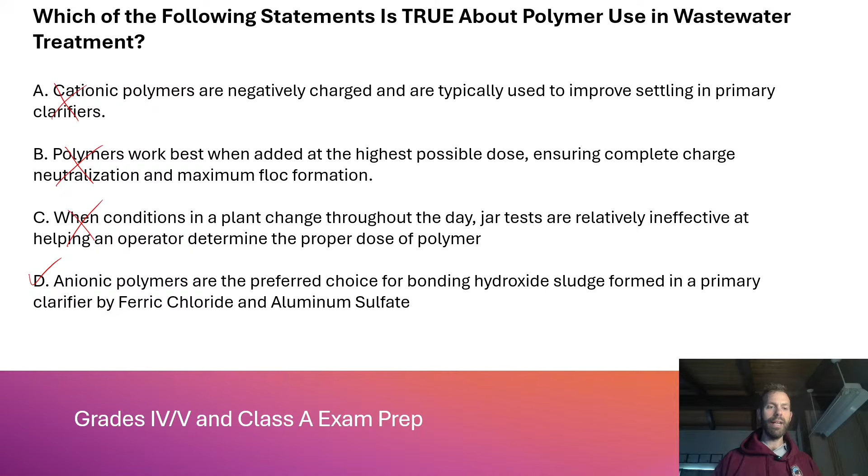One thing I didn't do here, just to keep it simple without being overly complicated—I want this complicated but not overly complicated. You will run into a lot of 'none of the above' options, and sometimes none of the above is the correct answer. Be very careful with those. On my 4th exam I had one I'll go die on that hill was 'none of the above,' and at least one on my 5th exam too. I didn't do any of those here, just letting you know, be ready for that.

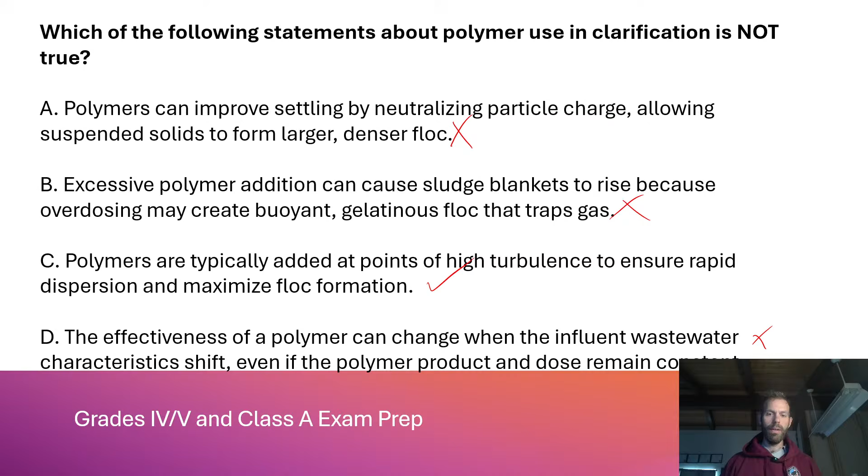Polymers are typically added at points of high turbulence. We already went over this. That is absolutely false, so C is your correct answer. You do not add polymers at points of high turbulence, gentle mixing is needed. And the D statement is true - I'm not going to read it again, but you can come back and look at that if you want. So D is true, so it's not the correct answer. C is the correct answer.

So I like the 'best defines' because it's the best answer. Three of these are absolute non-starters. Only one of them could possibly be true. But sometimes, and I've got some of them on here, you're going to get very, very similar and plausible answers, and you need to choose the best of those answers, okay? This is not one of those scenarios, but they're coming for you.

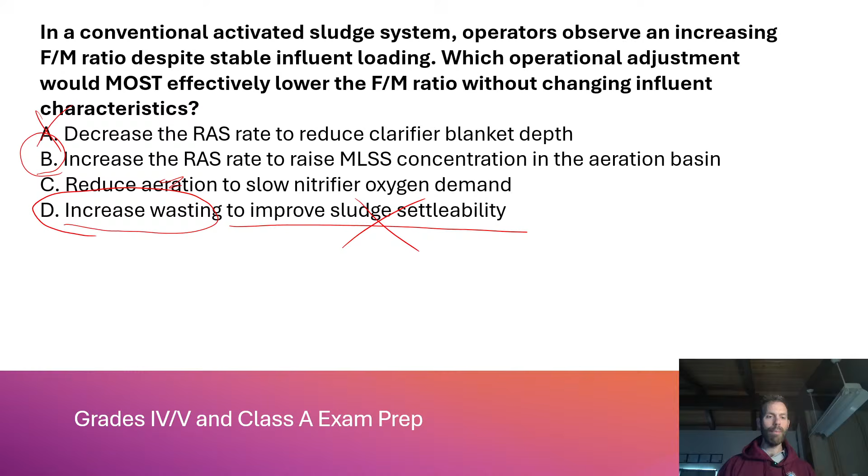Increase wasting would be my operational choice over just increasing the RAS rate, but that's not why I said to increase wasting - to improve sludge settleability, no. I would increase wasting to raise... I'm sorry, I'm wrong about this. I just got confused. Everything I just said about D was wrong. You would decrease wasting. I sometimes get confused on that one.

You decrease wasting to lower the F to M ratio. I'm glad I caught that and it didn't live in perpetuity on my channel that I screwed that up. You would have decreased your wasting to keep more inventory. So I'm sorry, D could have never been right, because if you increase wasting, you will raise the F to M ratio. I'm very glad I caught that. See, if I wasn't doing it live, you guys would have never known that I make mistakes. So B is the correct answer on that one.

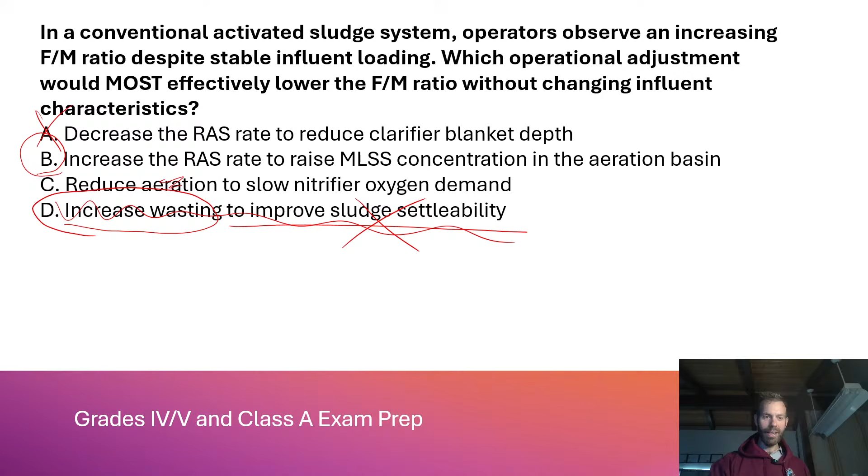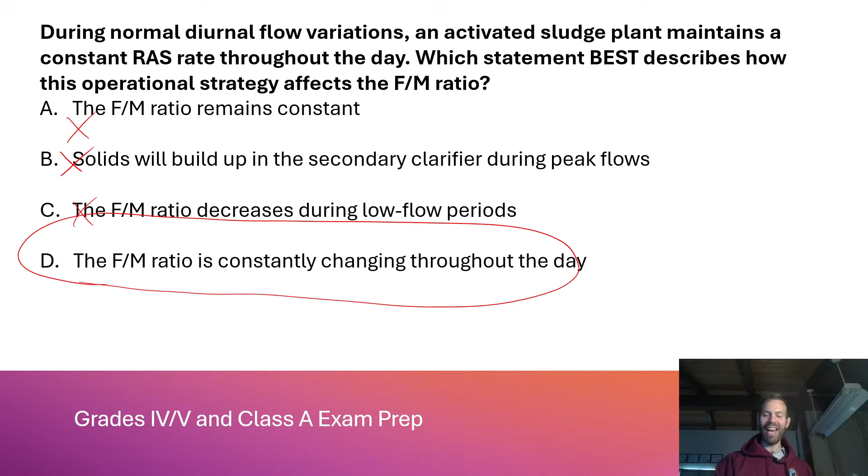Got a chat in here, and that is Matt. What's going on, Turd Nerd, says Matt from Operator Mindset. Thank you for joining, Matt. You just missed one of my, I got confused. I confused myself. Matt and I chat a lot on the phone these days, and I was going through this with him yesterday or the day before, and I said, God, I better write an answer key so I don't trip myself up going through this fast. And I did it, Matt, even though I've got an answer key and everything. I said something wrong. Anyway, next one.

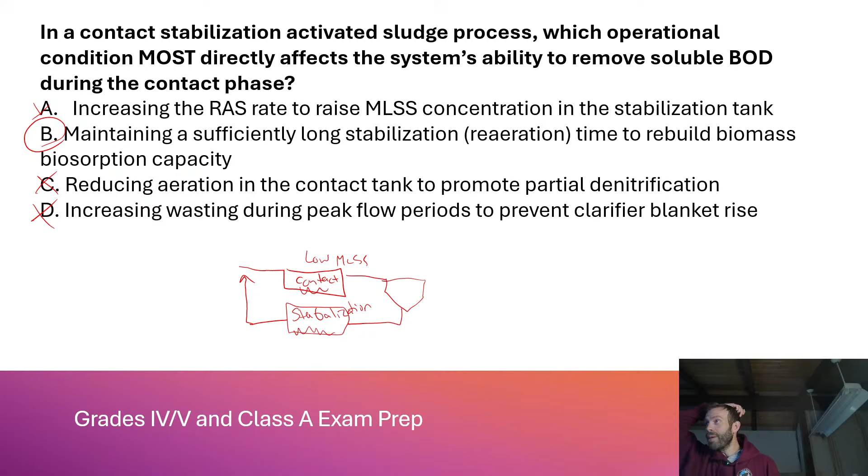Matt says, you are doing great, Shawn. Thanks for putting this information out there. Absolutely. Well, mistakes, they make you more human, right? And it should give you guys hope that goofballs like me can get through all this, and you can too. And a lot of you guys out there, I'm going to be honest, I watch Reddit, I watch Facebook, I watch LinkedIn. There are so many talented operators out there that know a lot more than I do. I'm going to be very frank about that. I think Matt and I just have the chutzpah to put a YouTube channel together about it, and we just love what we do, so there's a lot of talented operators out there that are way better than I am, and if they want to start a YouTube channel, I'll be right there as their first subscriber for sure.

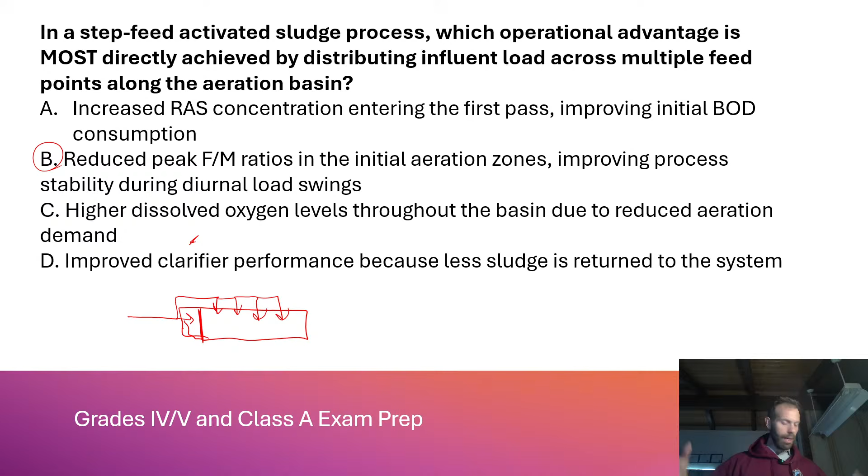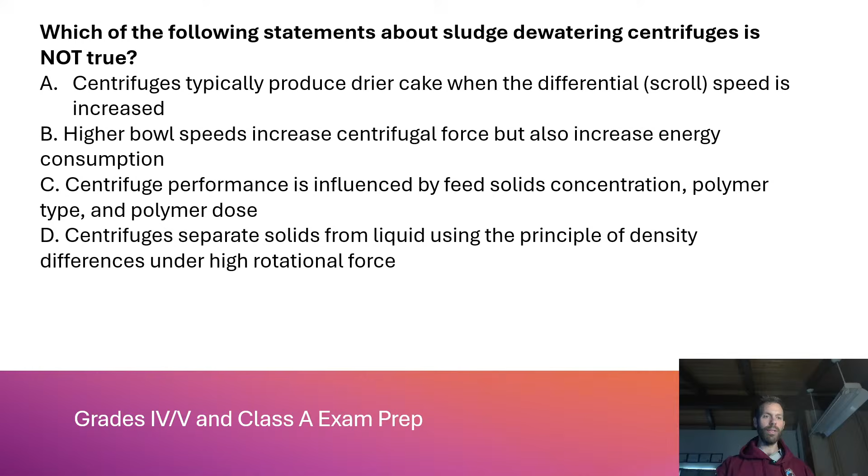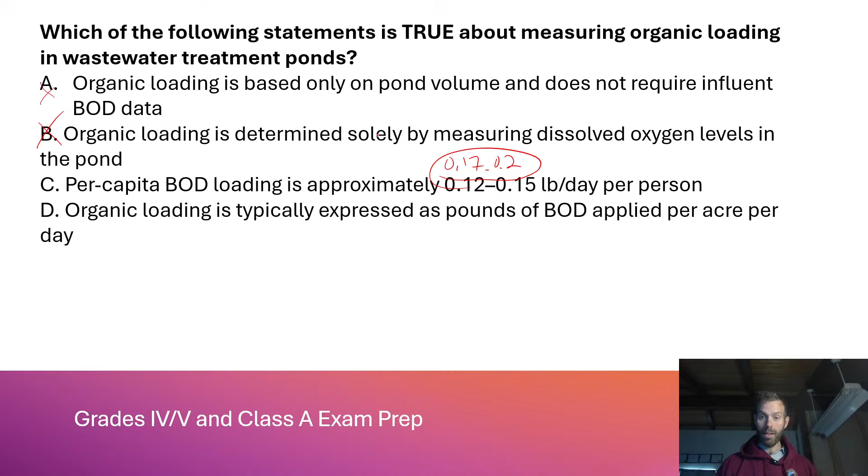Per capita BOD loading is approximately 0.12 - no, it's 0.17 to 0.2. That's the textbook number, okay? If you're given a per capita math problem, use 0.17 to 0.2. If they do not specify the number, it's 0.17 per person, pound of BOD per day per person, okay? So C is wrong. And D, organic loading is expressed as pounds of BOD per acre per day. Yes, pounds per acre per day.

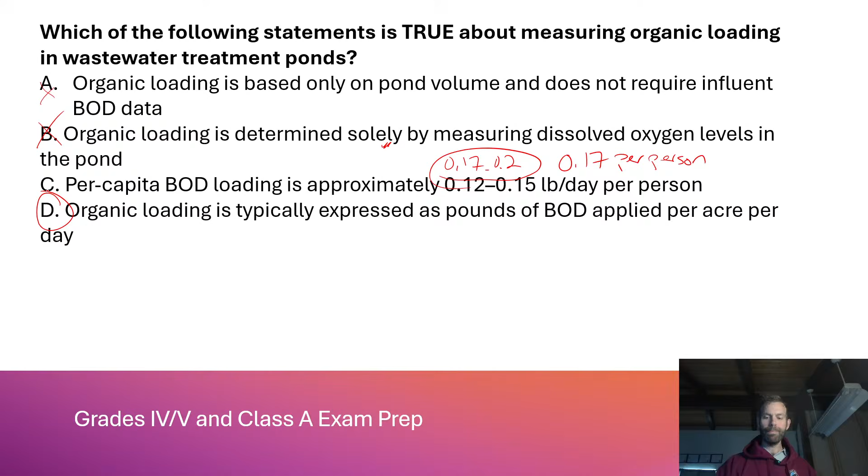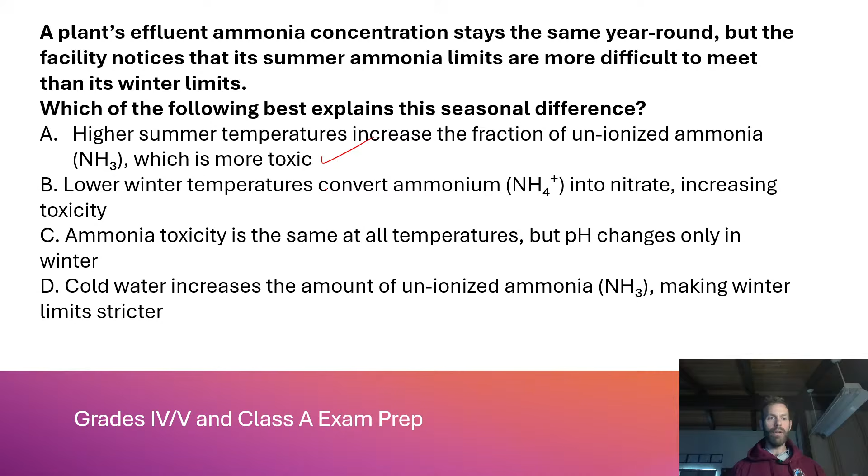And then the rest of these are not right, so I'm not going to read them all. B, C, and D are all incorrect.

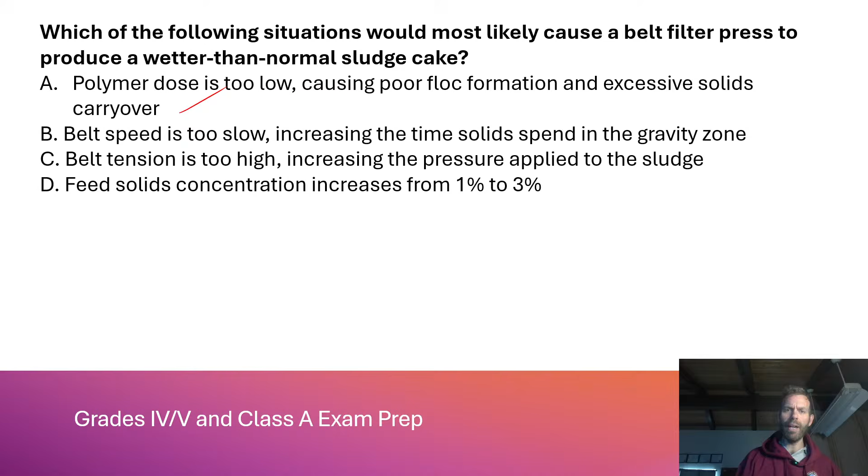I don't know what weirs are clean. I was going for something there. Maybe somebody scrubbed them that morning. I don't know. I don't know why I put the weirs are clean in that. But let's talk about what I'm getting at here.

Okay, if you're seeing this, it is A, sludge has become septic due to insufficient sludge withdrawal. Carly, I think she said A question mark, so I don't know if it was, both of these are A, so if it was the last one or this one, you're correct on both.

Yeah, man, you're gonna get these gas bubbles forming. I wanna get a video of it next summer. My primary clarifier, it's kind of hard to explain, but I actually get denitrification accidentally in it in the warmer summer months, and I'll do a whole video on it. Without you being able to see what happens and how the water flows through the plant, the recycle streams flow, you'd be like, well, how are you denitrifying in your primary clarifier if you're not even using it?

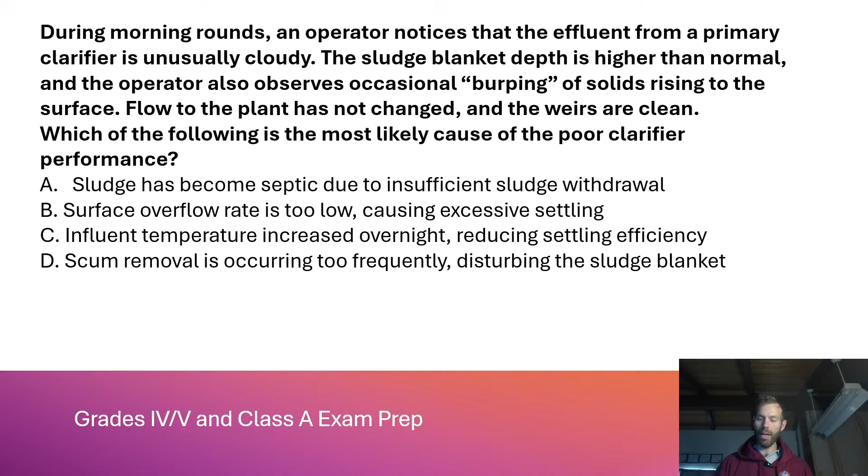The rest of these would not cause burping necessarily. So yeah, no, it's A.

So let's go through it. A, the Regional Water Quality Control Board. Well, you would call them. That's my regulator. But if it's a large spill, would I call them first? No. There was a lot of debate about this, actually.

I had my annual inspection with my regulator earlier this year, or actually, maybe it was in August. Now, wow, it's been a while. And I asked her this question because different people said different things to me. And she said, no, you would call Cal OES. You call it, yeah, we want to know, and you have to file the report with us. But if it's a large spill, Cal OES has a 24-hour a day, 7-day-a-week emergency line.

That's who you call if it's going down, okay? Local fire department, you would, yeah. County environmental health, you'd call all of these people and notify them. But who are we talking to first, okay? It's Cal OES. Those of you who are not in California, this does not apply, but you might get something similar, so know who you're supposed to be calling.

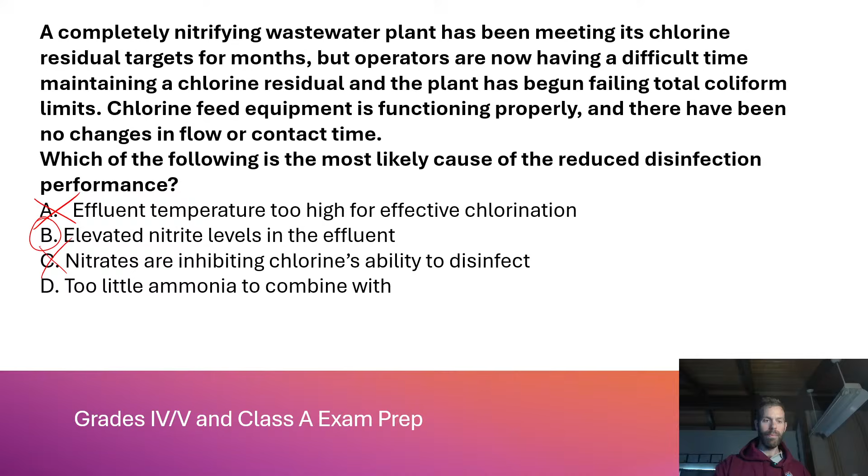So A, it relies on plug flow hydraulics? Absolutely not. A plug flow is this: here's my basin, and it's just straight through, that's plug flow, okay? Complete mix is different. Instead, imagine this could be a basin like a square, but let's do a circle, and it's just churning, it's this big tub of chocolate milk, right? That's what I like to say. You dump your influent in, and it hits, and it just mixes in with everything. It's mixing all the time, and flow is not plug flow like this. This is mixing too, but not in the same way that a complete mix system is.

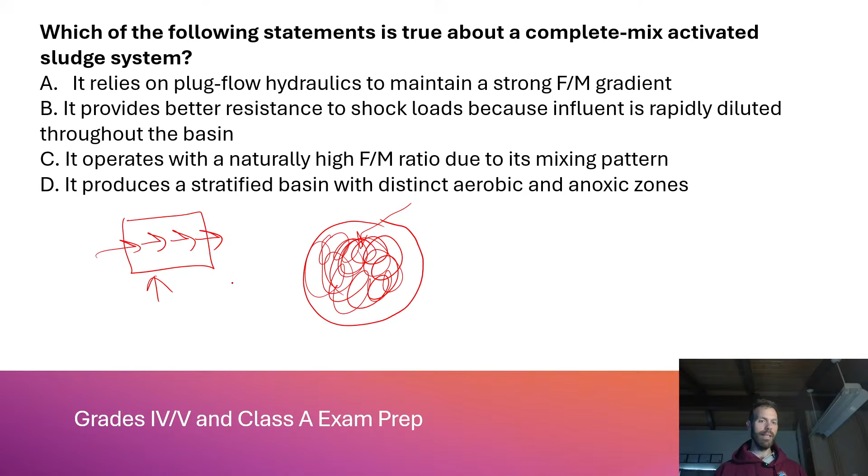So the answer here is B, it provides better resistance to shock loads because influent is so rapidly diluted throughout the basin. It's completely mixed up, okay? It does not operate with a naturally high F to M ratio.

You need to know all the different F to M ratios of all the different activated sludge variations, because you might be quizzed on which ones are lower or higher than others, and which ones operate at 0.2 or 0.5 or 0.1 or 0.15. These tests are no joke. It sounds like, oh God, I gotta memorize all those numbers. Yes, you do, sorry to be the bearer of bad news. You gotta be able to navigate some of these more advanced questions. And of course, I'm not getting on a soapbox about the tests, but we all know we'd just go look it up in a book. Like, why do I really need to know that for a test? But it's the reality we live in.

You must know it. And no, there's no way it produces a stratified basin because you're mixing it up all the time. So the answer is B.

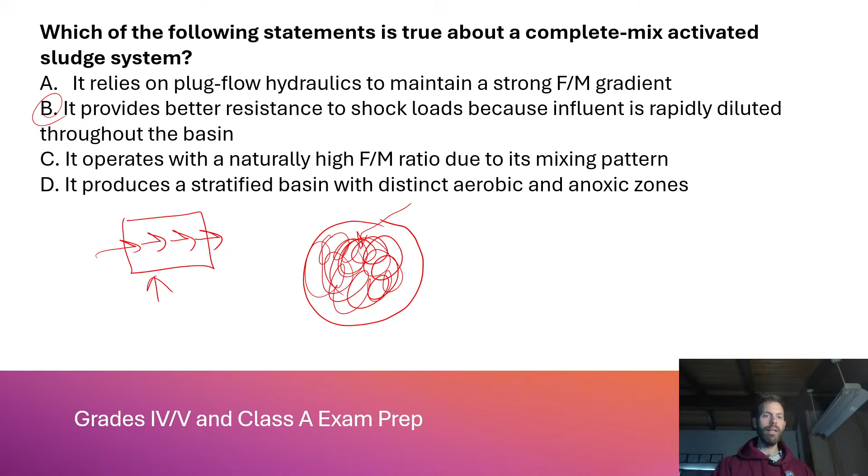This is very similar to what I just asked, but I wanted to include it because of what I just said. You need to be able to compare and contrast. The layman would look at this and go, okay, let me just do step feed again. We've got entry points here, here, there, there, there. Complete mix, mixed up all the time, all the time, okay. Now there's a difference between these two. Remember what I said earlier: step feed's only swapped to when you need it. It's not always on. Step feed oftentimes, you can have plug flow through your plant, and then when you need it, you move to step feed.

So why would I choose complete mix over step feed? To reduce the impact of peak flows by distributing across multiple feed points? No, that's step feed. So I'm choosing complete mix. To create a strong food gradient that favors rapid BOD removal at the front? No, because it's completely mixed. The front of what? It's a big circle. So no, B is not right.

C, to provide maximum dilution of incoming loads and improve resistance to shock loading? Yes, because typically by the time I've switched to step feed, the shock load's already here and I've realized it, and now I'm moving to try to disperse and spread out that loading across the entire aeration basin, but I'm already behind the 8-ball. Where complete mix shines versus step feed is it's always mixed all the time, so those gnarly loads, by the time you realize it's hit you, you're already diluting it and can adjust, so you're a little safer against those. And D's wrong, so no. Keep losing my pen, there it is, D.

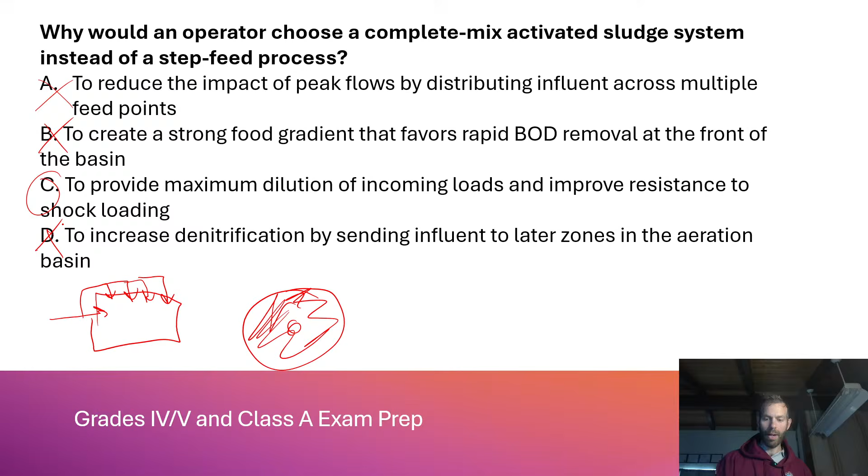Next one: which condition is most likely occurring if a dissolved air flotation unit develops a thinner than normal float blanket and effluent turbidity begins to rise? This would be a DAF unit, DAF or DAFT, dissolved air flotation thickener. They're really not different, they're just called different things. A thickener you're going to see used on WAS, waste activated sludge. A DAF is going to be used on FOG and stuff, like industrial plants. They use them to get the fats, oil, and grease out of there, so you lower the BOD loading downstream.

So the float blanket is what floats to the top. A, the polymer dose is too high, causing the float to harden. B, the saturator pressure is too low, reducing bubble formation. C, the flights are operating too fast, creating surface disturbance that prevents a stable float blanket from forming. D, the air to solids ratio is too high, causing excessive flotation.

You need to know the air to solids ratio. I don't want to give the wrong number, but it's like 0.01 to 0.05. Oh, I don't know if I'm telling you the right number there. It's a really small decimal, but look it up, please. If you're watching this, don't take that to the bank because I don't know that for sure. I don't have a DAF unit. I had it memorized, it's very, very, very low, it's like 0.01 to 0.0 something.

You might be asked to answer what that ratio is, or it might be one of the correct answers about a DAF unit is the air to solids ratio, okay? So just be aware of that.

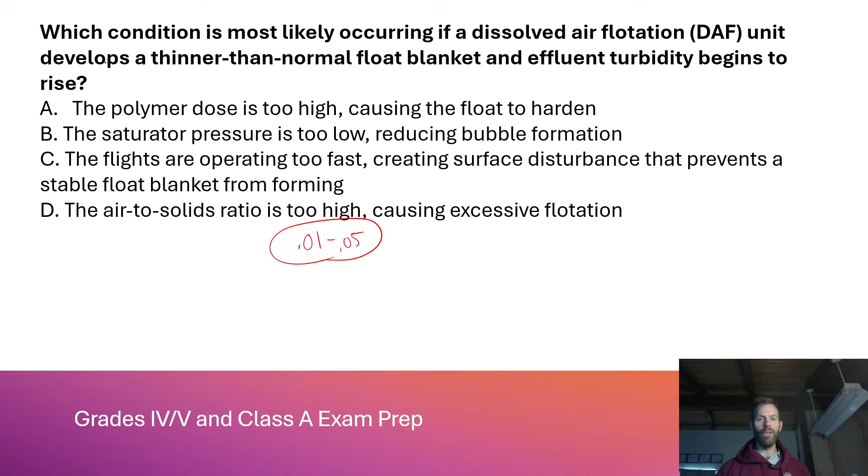So let's go through these. The polymer dose is too high, causing the float to harden. No, that's not going to develop a thinner than normal float blanket. It could cause it to harden and be jelly-like, but it would be pretty thick. So no.

B, the saturator pressure is too low, reducing bubble formation. Maybe, but from my research, this might actually create a thick float, okay? So not necessarily B, but if C wasn't in there, I might look at B.

C, the flights are operating too fast, creating surface disturbance that prevents a stable float blanket from forming. Yes, those flights on the top move very, very slow. The one DAF unit I know about in the county I'm in hasn't responded to my request to do a video, so I'm hoping at some point we could cover dissolved air flotation. I don't know very many around here, but they move really, really slow. They don't move fast.

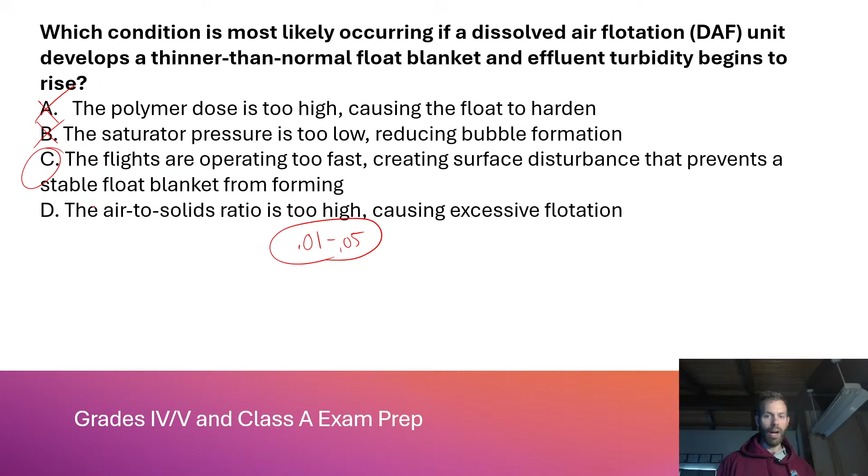And if they're going really fast, that float is going to be thinner because you're skimming more off really fast, and effluent turbidity will rise. Once you get a solids blanket, if you've ever seen these flights move, they move so slow because the faster you move, the more turbulence there is. You could shake that sludge up and it would disperse. You don't want to do that. So yeah, D is not correct, because if you're causing excessive flotation, you have a thicker than normal float blanket.

Which of the following statements is not true regarding chemicals commonly used in wastewater treatment? A, ferric chloride is often used for phosphorus removal and can help improve sludge dewatering. B, sodium hypochlorite is used for disinfection but degrades over time, especially in warm storage conditions. C, polymer is typically added to increase floc strength and improve solids capture in clarification and dewatering. D, alum increases pH as it reacts in water, making it useful for raising alkalinity in low pH systems.

Which is not true? Let's go through them. A, ferric is used for phosphorus removal. Yes, and yes, so A is correct, that is a true statement, so A is not the correct answer.

B, sodium hypo, this is a true statement, so it is not the correct answer. It will absolutely degrade in warm storage conditions. It happens to me here, and then I've got to increase my dose. If I forget to change my settings on my chemical feed pumps after I get a delivery, my chlorine shoots through the roof and I might get a high chlorine alarm on my effluent. It's a thing. Whenever a delivery comes, just make sure you're adjusting your dosing.

Polymer, this is a true statement. C is true, so it's not correct. You are using polymers to increase floc strength and improve solids capture in clarification and dewatering.

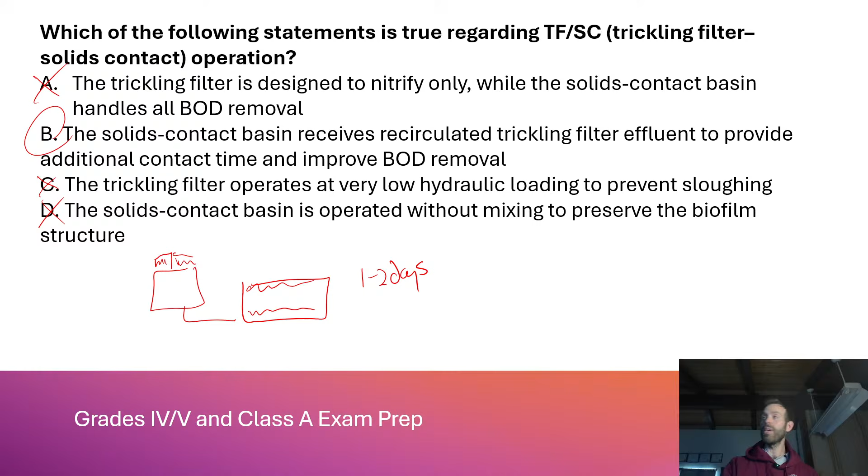Sun says B, B, B, B, B, B. Yeah, B is correct, all the rest are wrong. Thank you, Sun, thanks for being so active in the chat. I appreciate it. Oh, and he says recirculation is preferred to improve efficiency. Okay, well, maybe I messed my wording up on this question, and you're catching a nuance in my wording. So either my wording is incorrect or I misunderstood the science behind it. Thank you, Sun, I appreciate your input. Let me get back to you guys in the comments section after I do a little research on that so I can understand it better. And Sun, feel free to drop more resources or even email me and we can talk about it.

If you run one of these plants, Sun, if you're open to an interview on the channel, that might be cool. If we could just talk about it. That's something I'm open to.

So, which of the following statements is true regarding the amount of BOD entering the plant during a storm event? This one is tricky and catches a lot of people off guard. A: heavier flows cause the incoming organic load to dilute, making it easier for microbes to consume all the BOD. B: heavier flows dilute the concentration of BOD, thereby reducing the overall amount entering the plant. C: peak wet weather flows up to 3 times design flow do not impact organic removal efficiency due to dilution effects. D: heavier flows dilute the concentration of BOD, but the overall amount entering the plant increases. A is wrong. Your concentration dilutes, but that doesn't mean it's easier for the microbes to consume. Heavier flows dilute the concentration, thereby reducing the overall amount - no, this is the big trick.

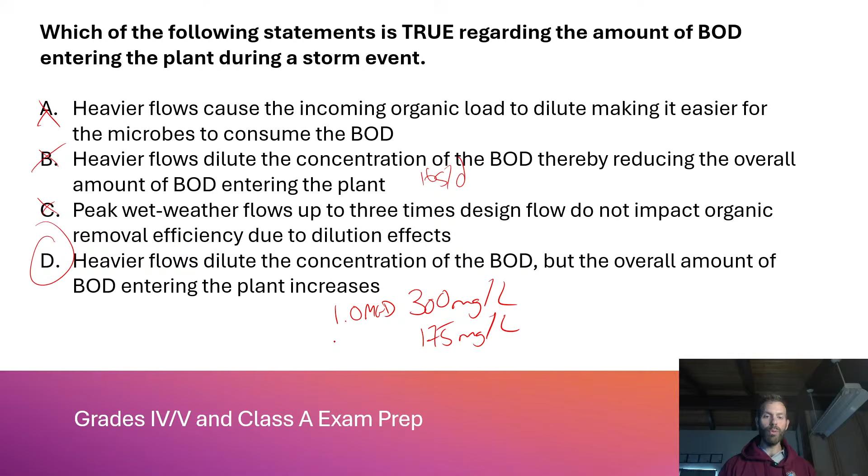If you're asked about concentrations dropping, that is correct, but I didn't ask about concentrations. What do we measure? Pretty much anything in wastewater treatment - pounds per day, not concentration. So peak weather: C is wrong, D is correct. Heavier flows may dilute the concentration of BOD, but let's do a thought experiment. Say my normal municipal flows are 300 milligrams per liter, at 1 mgd, let's keep it simple. But my diluted BOD is, let's say, 175 milligrams per liter, which is a little less than half. But my flows went to 3.5 mgd. I have more BOD - think about all the stuff like infiltration and inflow. There's organics entering, there's soil and stuff from people's drain pipes and downspouts, and all the junk in the collection system that's cut loose and heading your way. So the concentrations may drop, but your overall pounds go up, okay?

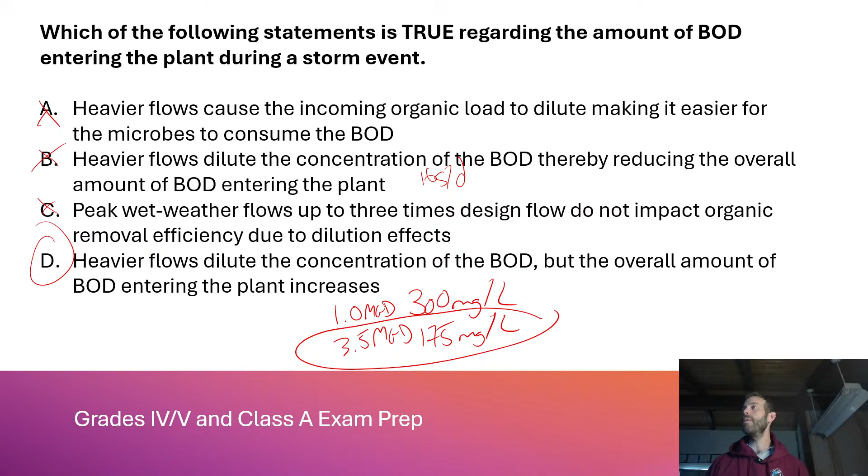Oh, I'm getting lit up in the chat here. This is a lot, Sun. I am from India, not so much fluent in English. Okay, well, maybe there's something lost in translation between our definitions, but if you've got that, that's cool, man, whatever. I'm totally interested in digging into that question because I don't want to give out bad info. I was pretty well researched on that, but dude, I'm about as open as they come - if I'm wrong, cool, man. And then he says storm brings big particles into the system - yep, and like vegetation, yep, absolutely. Thank you, Sun. Yeah, D is correct.

Which federal regulation establishes the standards for the use or disposal of sewage sludge, including pathogen reduction, vector attraction reduction, pollutant limits, and management practices for biosolids? This is a federal law - everyone needs to know this one, no matter what state you're in, if you're in the United States anyway. A: 40 CFR Part 141. B: 40 CFR Part 122. C: 40 CFR Part 503. D: 29 CFR Part 1910. Which one is it? Not going to read all that - there's no need to. It is 503. The correct answer is C. The 503 regs is what they are called. Just know those, that's it.

Now let's have a question about them. Which of the following is not true about Class B biosolids under 40 CFR Part 503? A: Class B biosolids must demonstrate a geometric mean fecal coliform density of less than 2 million MPN per gram based on at least 7 samples collected over a representative period. B: Class B biosolids may meet vector attraction reduction by achieving a minimum of 38% volatile solids reduction or by meeting one of the other approved VAR options in Part 503.33. C: Class B biosolids require additional pathogen testing for salmonella, enteric viruses, and helminth ova, similar to Class A requirements to confirm adequate pathogen reduction. D: Class B biosolids rely on site restrictions like harvest delays, grazing restrictions, and public access limits to reduce potential exposures following land application. I'm not going to read all that again - the one that is not true is C. They don't have to go through the same pathogen testing that A does, but you should know all these requirements for B and A. The rest of these statements, A, B, and D, are true, and it would behoove you to know that.

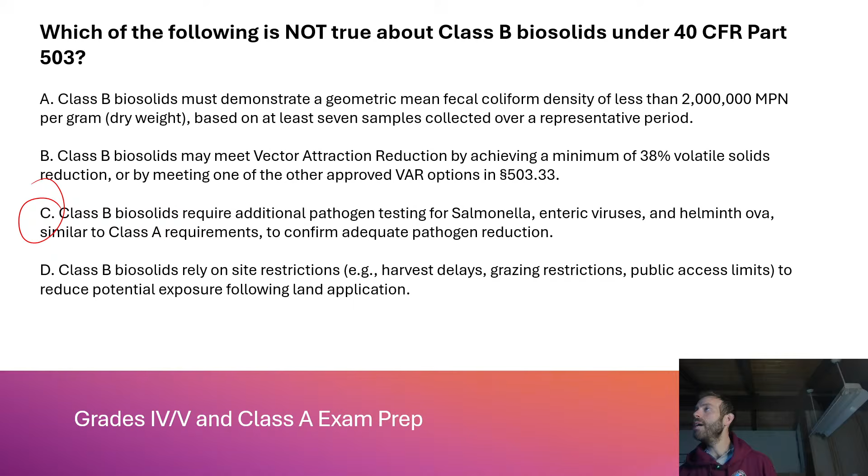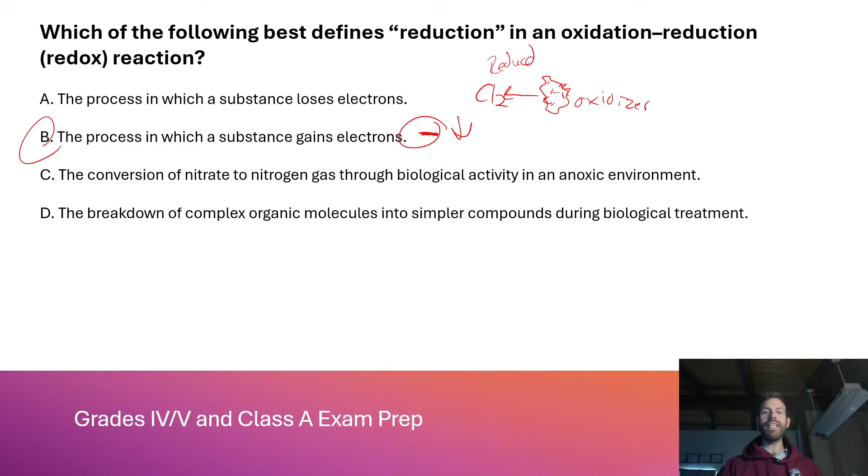So when I'm oxidizing something, let's take an example. I have a bacteria - this is my little bacteria, okay? I'm disinfecting, and I use Cl2. Keep it simple - Cl2 is an oxidizer, right? And the bacteria is going to be what's oxidized. The oxidizer takes the electrons and reduces. I've reduced the oxidizer because it gained the electrons, and I oxidized the bacteria and killed it by taking its electrons. An oxidizer will oxidize other things, and when it does that, it itself reduces. So just chew on that a little bit.

I got a lot of answers from Sun - thank you, Sun, for being so active. He says denitrification takes place in secondary sedimentation and leads to sludge bulking. If it happens in the sludge, yes, if denitrification happens in the secondary clarifier, it will float your sludge blanket. So if you get a question about floating sludge at the top of your secondary clarifier, and you sludge judge it and all the water underneath is clear, you have denitrified in your secondary, okay? You should know about that. Your goal is to make sure that does not happen - you want to either increase recycle streams, waste more, increase dissolved oxygen, whatever it is you and your plant have decided needs to happen. So what Sun is referring to is when it does denitrify in the secondary, it will float your blanket, and that is not what you want.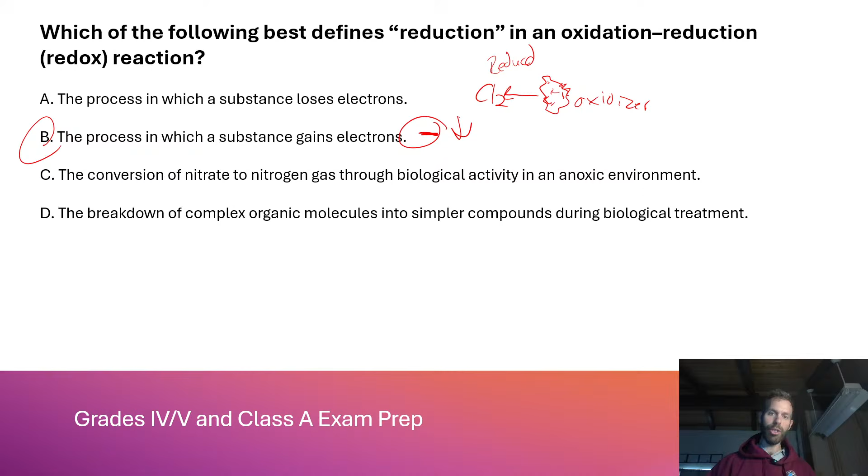And yeah, you got that right, Sun - on this one it's B, the process in which a substance gains electrons.

Which of the following statements about ferric chloride use in wastewater treatment is not true? A, ferric chloride can precipitate orthophosphate by forming insoluble ferric phosphate compounds. B, ferric chloride addition can lower pH by releasing hydrogen ions. C, ferric chloride is commonly used to enhance sludge dewatering by improving floc structure. D, ferric chloride increases alkalinity in the aeration basin because ferric ions consume nitrate during biological phosphorus removal. Which of these is not true? For the sake of time I'm not going to read them all - D is not true. No, it does not increase alkalinity, and I don't see ferric ions consuming nitrate in phosphorus removal. It's just a nonsense statement.

That whole statement's nonsense. Ferric chloride should decrease alkalinity.

When a treatment plant is experiencing nitrite lock and free chlorine is being rapidly consumed, which action can temporarily improve disinfection capability while the underlying cause is addressed? This is a tricky one. I did this for a very specific reason. I'm going to set up a premise. You might get this or something like it. I very much specified free chlorine. Which action can temporarily improve disinfection capability while the underlying cause is addressed?

Let's go through these. A, increase aeration in the secondary clarifier to boost dissolved oxygen levels. This may be an option to fix the underlying problem. It may be, but I don't have enough information to actually address nitrite lock. I don't know if it's a pH thing, an ammonia thing. I'm not really sure what is causing the nitrite lock. So A could be a long-term solution.

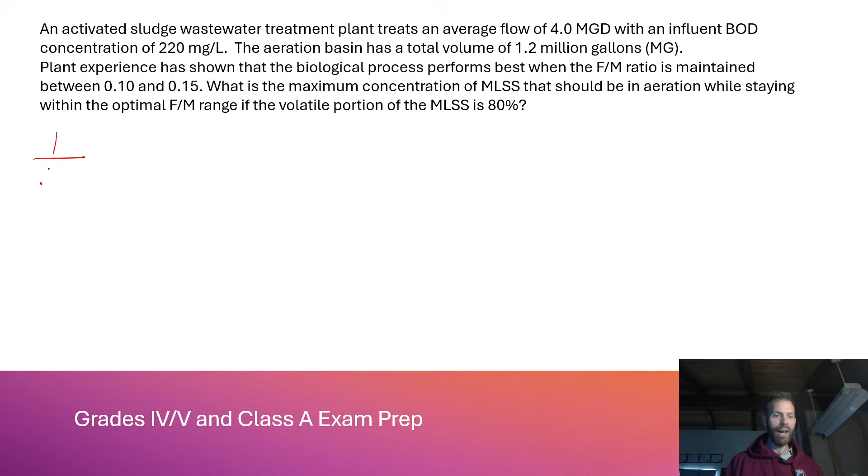Okay, so this is how Christian does it, and I'm stealing his method if he's watching. 1 divided by 0.1 — why am I doing that? Because we have a food to microorganism ratio. So 1 divided by 0.1 is 10. Why is this number important? Because for every 1 pound of BOD coming into the plant, I have 10 pounds of MLVSS, mixed liquor volatile suspended solids. That's an F/M ratio, right?

So now what I need to do is use the pounds formula: 4 MGD times 8.34 pounds per gallon of water times 220 milligrams per liter.

I got an all caps thing from Sun here. Civil engineering, wastewater engineering is in our 3rd semester. Are you, sounds like you're a college student, Sun. Cool, yeah. So if this is fresh in your mind, this is pretty simple stuff for you.

So this is our pounds formula on BOD. 4 times 8.34 times 220 milligrams per liter is 7,339, it's 0.2 but I'm just going to drop that 0.2. Pounds of BOD per day. Say that per day. And then what I'm going to do here is take these pounds, 7,339, times 10.

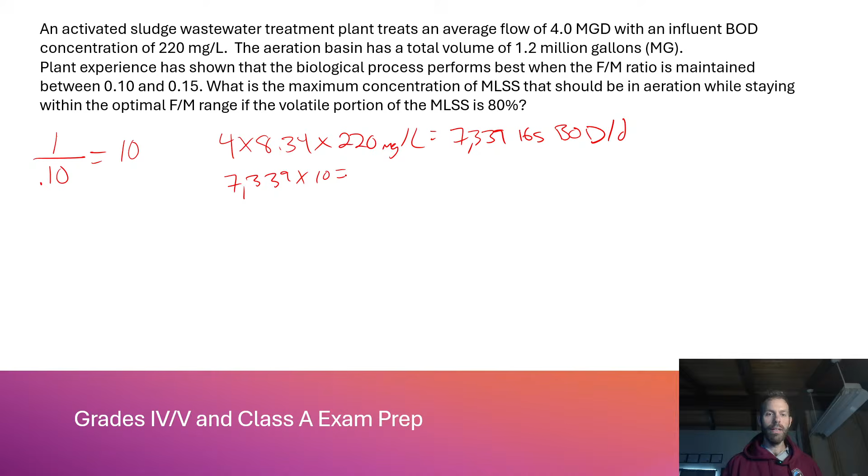That is 73,392 - oh sorry, 73,339, I just didn't take the 0.2 out of my calculator. Hold on, 7339 times 10, 73,390. Sorry guys, again I'm doing it live so I'm messing up and you guys will be okay with that. Pounds MLVSS.

Okay, next. The aeration basin has a total volume of 1.2 million gallons. We've got a volatile ratio of the MLSS of 80%. So what I'm going to do first here is get my pounds of MLSS, and then we're just going to do a reverse pounds formula and we're done.

So, 73,390 - and if you did 0.2, if you didn't drop the 0.2 off, this would be 73,392. You divide by 0.8, sorry, divided by 0.8 will give me my MLSS in pounds. That's 91,737.5, I'll just say 737, I just dropped the 5 off. 91,737 pounds of MLSS.

I'll explain in a second, Sun. 91,737 pounds of MLSS, and so now I'm just going to do a reverse pounds formula. 91,737 divided by 8.34 pounds in a gallon, divided by 1.2 mg - that's the aeration basin. 91,737 divided by 8.34 divided by 1.2 is 9166.3, 9167 depending on how you rounded. 9166 milligrams per liter is your answer.

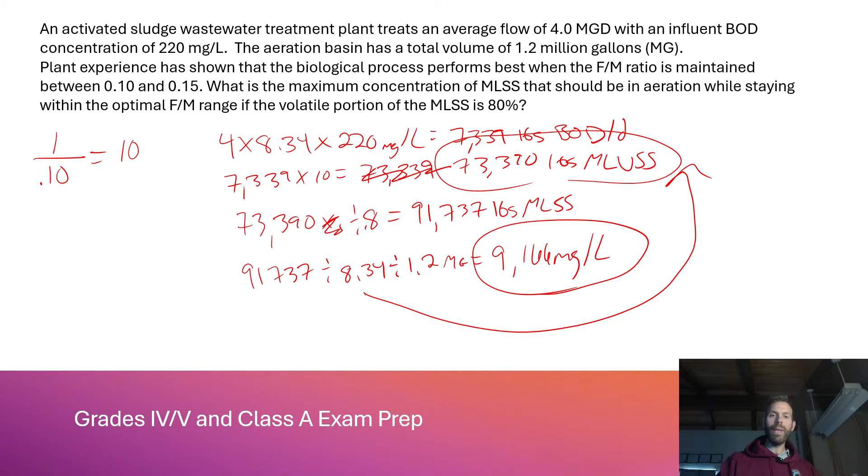It's not, you don't have to solve it as fast as you can, Sun. I'm just going to do this for people because I've got to get back to work. So go ahead and pause this if you want to work it out without me talking, but I'm going to keep going.

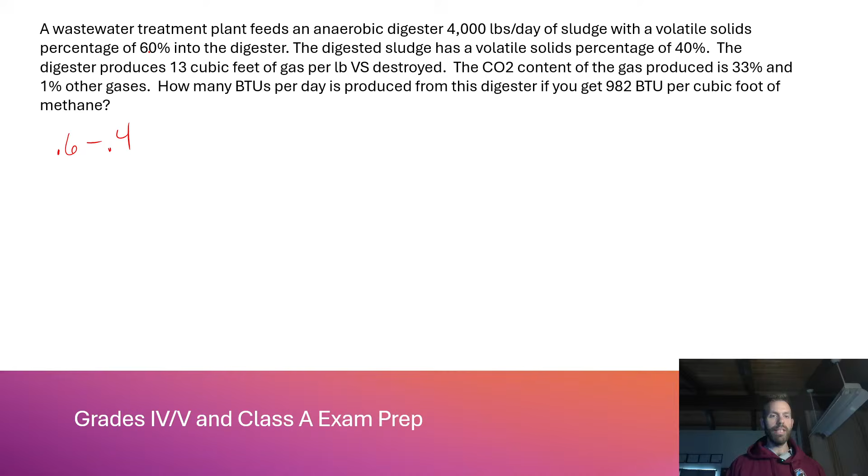Okay. First thing I like to do is get my volatile solids reduction. So the volatile solids reduction math equation is, in decimal form: in minus out. So 60% is in, 40% is out. In minus out, divided by in minus (in times out), times 100. Okay, that's your volatile solids reduction.

I'm actually not going to multiply by 100. I'm going to leave it in decimal form, because I got to use that decimal. So 0.6 minus 0.4 is 0.2.

0.6 minus, and then you do these parentheses first, 0.24. Got to do the parentheses first, we'll screw the whole thing up if you don't. So this is going to be 0.2 divided by 0.6 minus 0.24, which is 0.36. 0.2 divided by 0.36 is 0.55 all the way continued, so I would say 0.556. It would be 55.6% volatile solids reduction, which is pretty good.

And so that's my volatile solids reduction. Now, I've got 4,000 pounds a day of sludge with a volatile solids percentage of 60%. So I take 4,000 pounds a day of sludge, times 0.6. My actual volatile solids being fed is 2,400 pounds.

Now, what am I reducing from that? Let's bring it down here, I'm starting down here, guys. 2,400 pounds of volatile solids. What's my reduction? 55.6%, or 0.556. That is 1,334.4. I'll just call it 1,334 pounds destroyed.

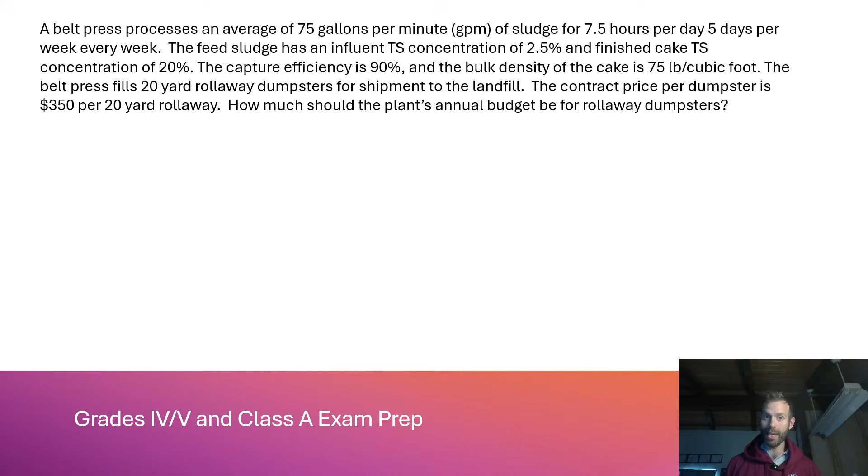Before I get into this, the answer to Sun's question: do you allow calculators to solve these problems? Yes, you are allowed a calculator. Now let me talk about the calculator. In California, I was actually very impressed with the calculator they gave me for the grade 5. It's not scientific, you're not allowed any, it's just a basic 10-key calculator.

Like actually I've got one right here. This is what you're gonna get. Very simple, you're not allowed anything other than this. Sometimes they're on the computer, and that is awful. I had to have that calculator on my T3, and I was clicking the buttons on the keypad. I've not seen that on the wastewater side, but I've heard of people getting that when they go to the testing center. I would call ahead and ask if you're going to be given a calculator that's physical like this.

I find this better, but if you're not going to be given one of those, I just recommend you get used to doing it on the computer, because it is what it is. It used to be that you could bring your own, and they would just make sure that you didn't have a scientific one with equations saved in it and stuff. But I never really understood saving equations, because they give you a conversion sheet, you're allowed a conversion sheet, they give it to you.

And so anyway, let's read this one. Oh, we already read it. Let's talk about this. We are trying to budget an annual budget for rollaway dumpsters.

So the first thing I'm going to figure out is my pounds per year fed to my belt press. Sorry, not million gallons per year, in pounds per year. Sorry, I'm getting tired, it's been a long... I said it was gonna be an hour and a half, and here we are at 2 hours. I just can't help myself.

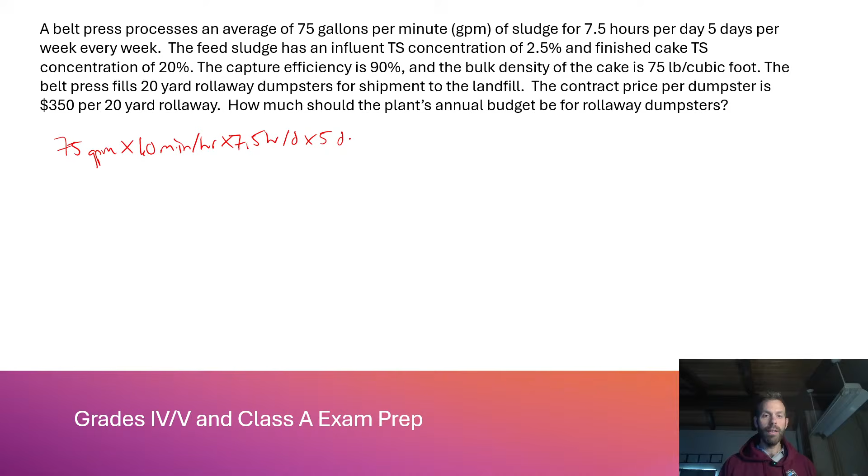All right, 75 GPM, gallons per minute, times 60 minutes in an hour. Jeez, I'm getting tired. Times 7.5 hours in a day that's being used. Be careful, 7.5 hours per day is when this belt press is in operation, don't multiply by 24, okay. Times 5 days per week, times 52 weeks in a year. I'm looking for an annual budget. You might get this in monthly, you might get this in weekly, I don't know how it's gonna show up, or if you even get it.

I don't think I've ever seen this math problem on an exam, but that does not mean you don't need to know it. Remember, there's different exam versions. You need to know how to do this. I just didn't happen to get this.

So 75 times 60 times 7.5 times 5 times 52. What did I just do? 75 gallons per minute times 60 minutes in an hour times 7.5 hours in a day times 5 days in a week times 52 weeks in a year gives me, so I'm reading this right, 8,775,000 pounds per year fed to this belt press. Okay?

Let me just make sure that I'm not... pounds per year, I'm so sorry, I'm getting tired, I'm sorry. That was a misspeak. Million gallons per year. Thankfully I wrote notes down because I anticipated this happening. It happened on my grade 3 where I started getting tired and saying things wrong, so I apologize for that. This is just the flow rate.

8,775,000 gallons per year. Again, I'm doing it again. To get million gallons per year, I'm going to divide by a million. Okay, let me just bring it down here. That gives me 8.775 million gallons per year. I'm so sorry if that confused people, like I said, I'm getting fatigued. So when I do all that math across the top, 8,775,000 gallons per year divided by a million gives me 8.775 million gallons per year, which I will round up to 8.78.

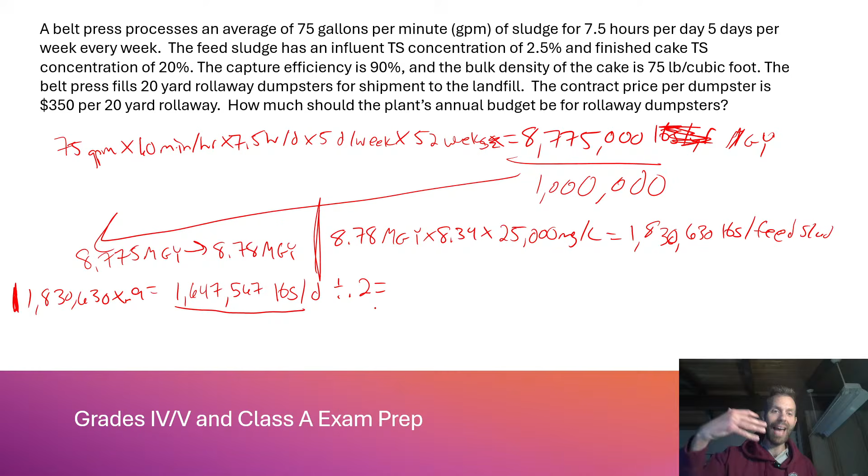So my feed solids is 1,830,630. I have a capture efficiency of 90%, so I multiply by 0.9, and the solids coming off the belt press are 1,647,567 pounds per year. But that's assuming it's 100% dry, which we know it's not. It is 20% dry. So now I'm going to divide this number, 1,647,567, by 0.2, and this is going to give me my wet cake, the stuff that's actually going into the dumpster. Okay, so if I were to do that, that should give me 8,237,835 pounds per year of wet cake.

Now we went to the lab, it says it in the math problem, we went to the lab, and it says we have the bulk density of the cake is 75 pounds per cubic foot. Okay, we have our pounds, let's convert it to cubic feet. Let's come down here. 8,237,835 pounds, and then we're just going to do a unit conversion here.

I like to do this method. This is not cross multiplication, by the way, this is called the conversion factor method. I just happen to put a multiplication sign right there. Some people do the railroad tracks where it looks like this, I've done a whole video on it, go check it out. Per cubic foot, so I'd multiply across the top, divide across the bottom. That gives me 8,237,835 divided by 75 gives me 109,838 cubic feet of cake.

But I've got 20-yard rollaway dumpsters, so we got to convert to yards now. We're going to do that same exact thing where I've got 27 cubic feet in a yard. Okay, cubic feet cancel, and that leaves me with 4,068 yards per year.

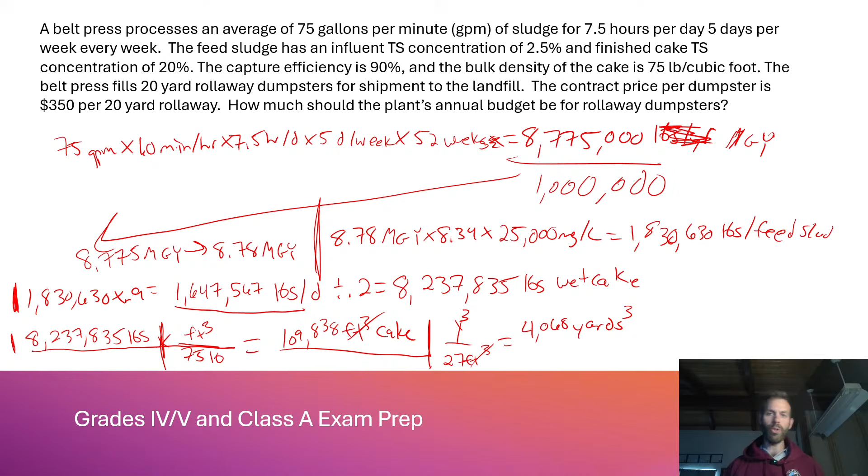Yards per year, okay? Now I gotta say, so we're in cubic yards. Now, when you hear us say yards, I'm not talking about the distance measurement, it's cubic yards, okay, and I should specify that, there should be a cube here. But when you work in a plant, you work out in the construction, we don't call it a cubic yard, we call it a yard. Give me a yard of base, give me a yard of this, give me a yard of that. It's a 20-yard dumpster, okay, just the vernacular. So now I know how many cubic yards I have, I divide by 20 cubic yards per dumpster, okay?

That should give me 203.4 per dumpster. Let me just do it in my calculator to make sure I'm not messing anything up. I'm relying on my notes, so if I button mashed something earlier, sorry. It's 203.4, but I can't buy a fractional dumpster, right?

So it's got to be 204 dumpsters. They will have this wrong answer on the test. If you do 203.4 times $350, they'll have that as one of the choices. Make sure you don't try to buy a fractional dumpster.

That's not a thing, you'd round up to the next nearest dumpster. So 204 times 350 is $71,400. That's 204 times 350. Okay, $350 per dumpster, you need 204 dumpsters.

Let's see, Sun says in our currency, 71,000. Yeah, it's a lot of money, man. And I see you got 71,151 on there. Just be sure that you're rounding up your dumpster, Sun, because we can't buy fractional dumpsters. You have to kind of eat that last dumpster.

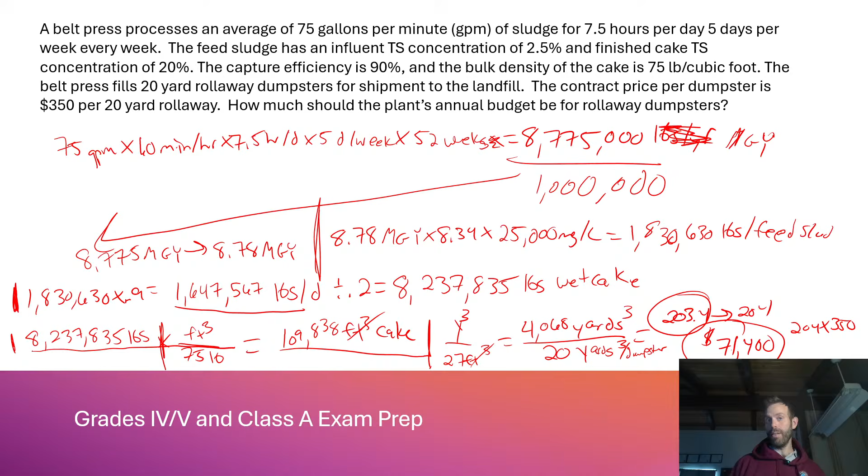It says we can use cake to generate electricity and make it economical. I'm sure you can, but all the people I know send it to either a landfill or it gets composted, not so much to make electricity. I think you might be thinking of biogas. Around here it goes to livestock feed, soil amendments, composting and fertilizer applications. That's where I'd expect to see it done the most. But if it doesn't meet the standards, it goes to the dump. I don't know of anybody using it to make money.

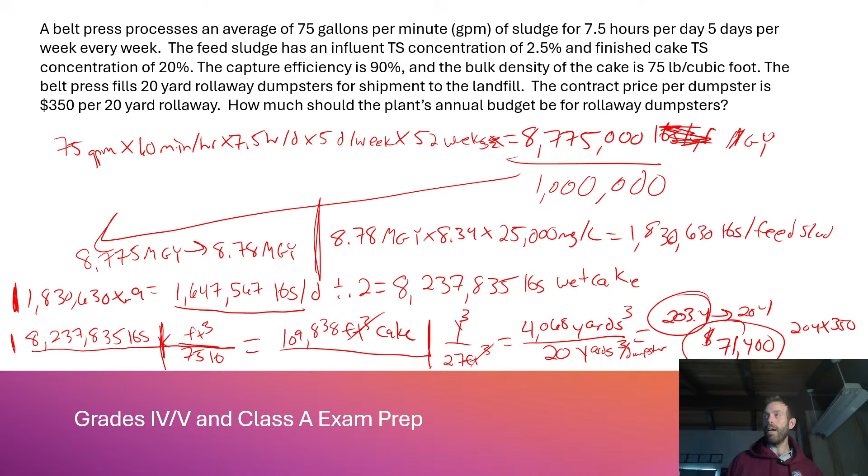Okay, I hope that helped. And he said, yes sir, right. Yep, okay, that's it guys. Boy, that was a freaking marathon.